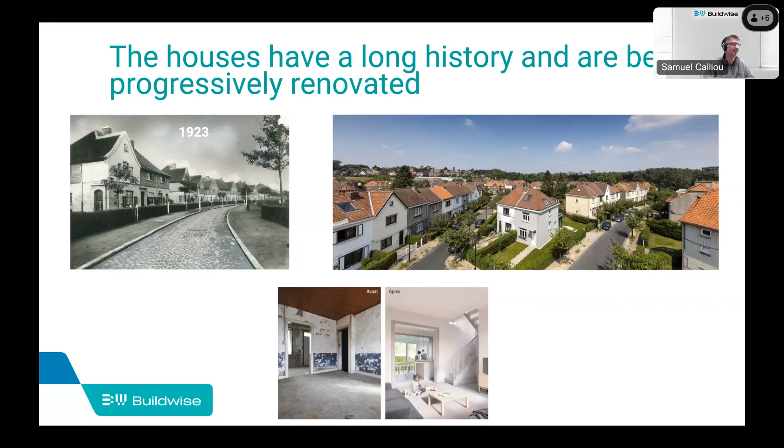These buildings can be quite old, with a long history. Some of the buildings in our sample were older than 100 years old. This kind of building has sometimes been renovated progressively in the past, and today we have to update these buildings to our current standards of energy and indoor air quality, but this is usually not easy.

So even in a very old dwelling, the indoor air quality can be an issue, especially in the bedroom, because in previous renovations, for example, the windows have been changed and other improvements made. So even if the airtightness of the building is not so good in general, you can have very good airtightness in the bedroom, and without a ventilation system, it is quite impossible to achieve good indoor air quality.

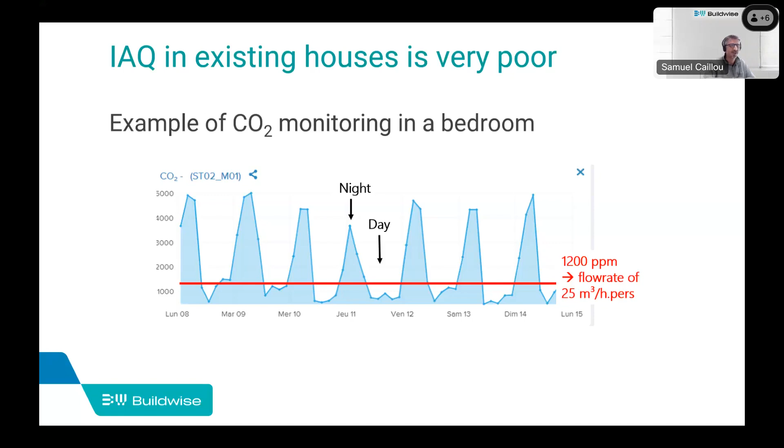And the most common systems for new buildings are for sure the fan-assisted exhaust ventilation system, mechanical exhaust ventilation system, and fan-assisted balanced ventilation system with possible heat recovery.

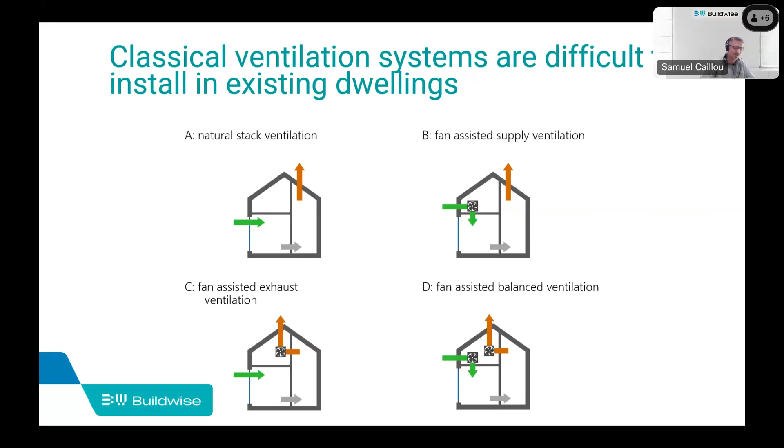But these systems are quite difficult to install in an existing building. The first problem is for sure the space needed, for example, the ductwork and the ventilation unit. But also some of the installation work is quite invasive. You sometimes need ductwork and then a service technical shaft to include this ductwork.

And for some ventilation systems, for example mechanical exhaust ventilation systems, you have to install an inlet or natural supply opening in a different room, and this is not so easy in an existing building.

Also, some simplified or incomplete systems are sometimes installed in existing buildings, but we also know that these systems are not efficient enough in most cases. And last but not least, cost is also a challenge in retrofitting a dwelling, and installing a ventilation system is sometimes expensive.

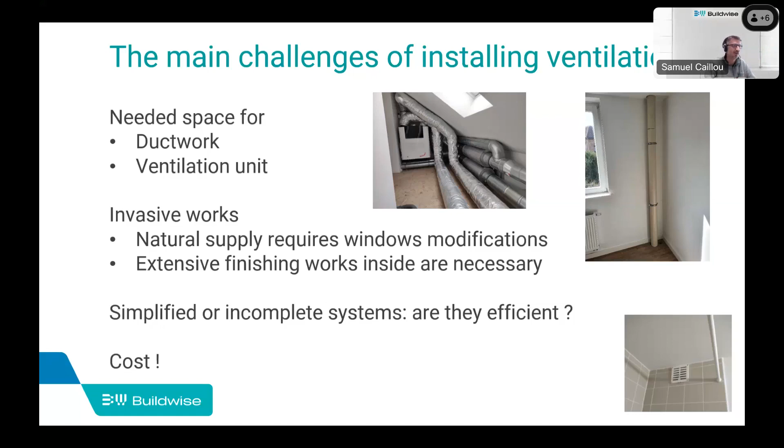So based on different simulation work, with the aim of finding more efficient, simplified ventilation systems, we have identified different innovative ventilation systems that are easier to install in renovation. The first of the systems is based on a mechanical balanced ventilation system.

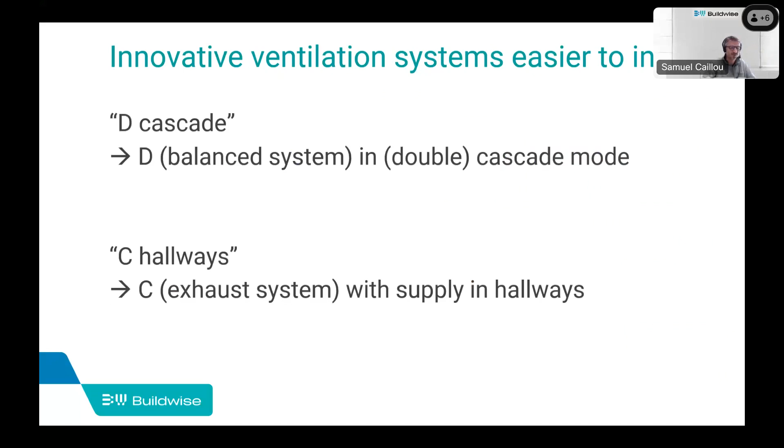in a double cascade mode, and the second one I will show you is a fan-assisted mechanical exhaust ventilation system, but we supply in the hallways. I will start with the first system.

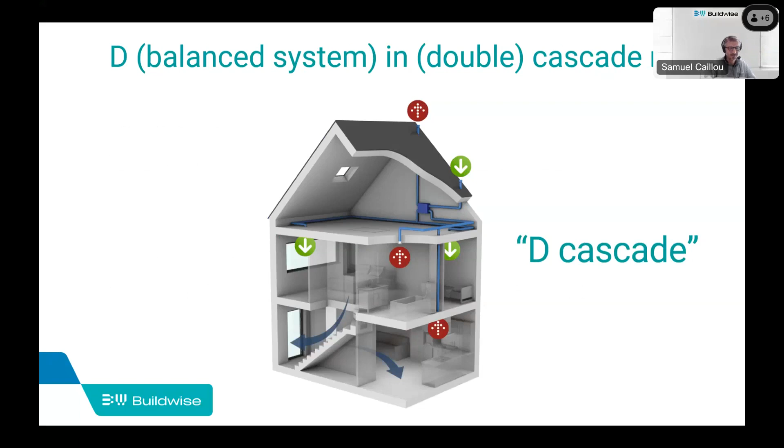So this is based on a balanced ventilation system, but with a specific and innovative ventilation strategy. I will show you this with an example, a two-story house. This is a quite small house with 2 bedrooms on the first floor.

So this is really a balanced ventilation system. As with the classical balanced ventilation system, you have mechanical supply in some rooms and mechanical exhaust in other rooms. But the particularity of this system is that the mechanical supply is only done in the bedroom, and not, in this case, in the living room. We have no direct mechanical supply in the living room.

The living room is ventilated by air transferred from the bedroom towards the hallways, the corridors, and then to the living room. And of course, we have mechanical exhaust in the kitchen, bathroom, and other service rooms.

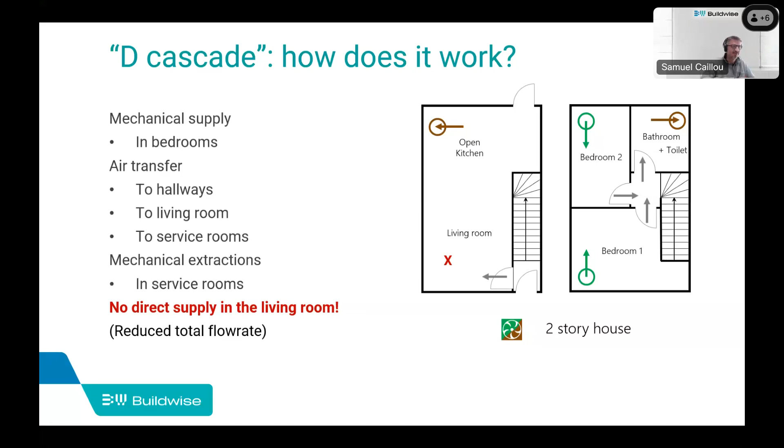This system is easy to install with current components on the market, for sure in Belgium and other countries. You need classical ductwork, classical air terminal devices, and ventilation units for balanced ventilation systems with heat recovery, for example—so classical components. It's easy to find these components.

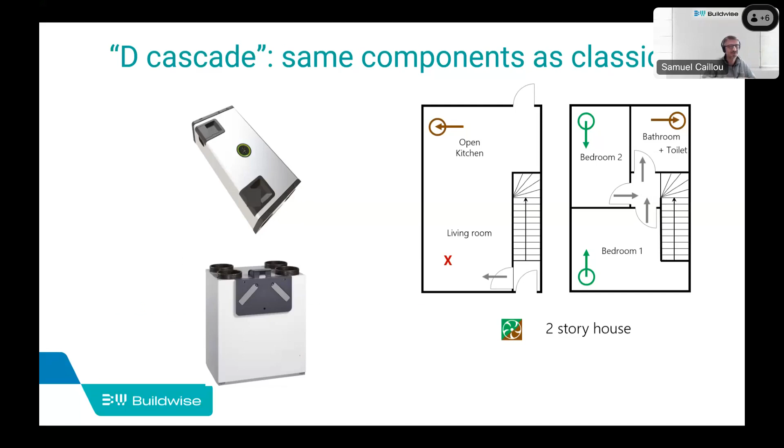This system can also be controlled with several possible control options. The first thing I have to say is that in this system, the total design flow rate is quite reduced compared to a classical balanced ventilation system for the same dwelling, so it's good for energy because the flow rate is already reduced.

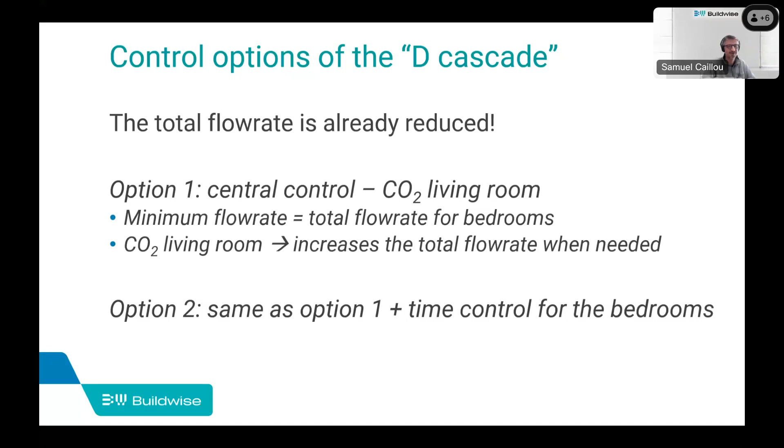But if we want to control the flow rate more, there are several possibilities. One of the first is to have central control of the flow rate based on a CO2 sensor in the living room, for example, and also a minimum permanent flow rate in the bedroom with this central control. Other options are also possible—for example, you can add time control or other controls for this system.

The main advantages of this innovative balanced ventilation system in D cascade is the fact that you don't need ductwork and an air terminal device in the living room, which is in some existing buildings the most difficult to install in a real building. So it's easier to install, and that also reduces the cost for installation because you can have a smaller ventilation unit and less ductwork and components. At the same time, the system is very efficient, and for sure as efficient as the classical balanced ventilation system.

In terms of indoor air quality, heat recovery is also possible, and as I just said, the flow rate is a bit reduced. Last but not least, this system is not influenced by bad air tightness of the building in terms of indoor air quality. So even in a building where the air tightness is not good or not known, this system will give good indoor air quality.

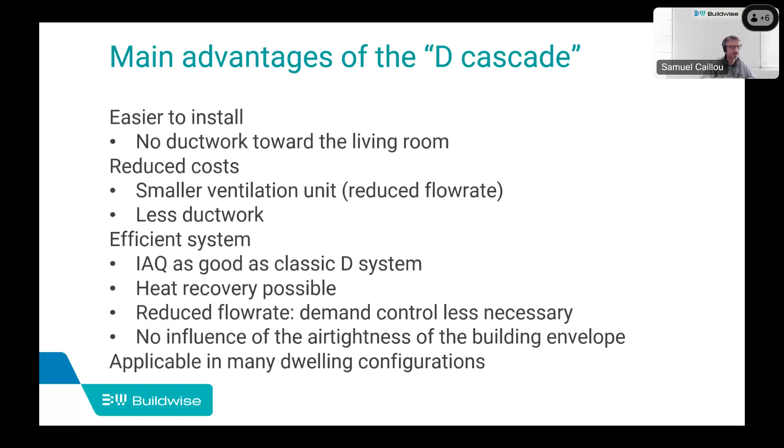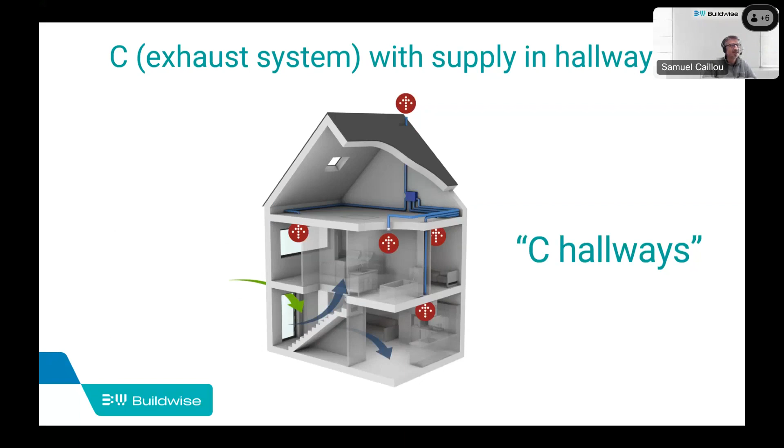Now, a few words about the second innovative system I would like to show you. This is based on a mechanical exhaust ventilation system, a fan-assist exhaust system, but in this case with supply in the hallways. Again, on the same example house with two bedrooms, I will show you the principle of this system. So it's a fan-assist mechanical exhaust system. You have natural supply in some places and mechanical exhaust in some rooms.

But the difference from the classical system is that here we have mechanical exhaust in each room, so also, for example, in the bedroom. The second difference is that you don't have an air inlet or natural supply opening directly in the room, for example in the bedroom, but only at one place in the main hallway or main corridor.

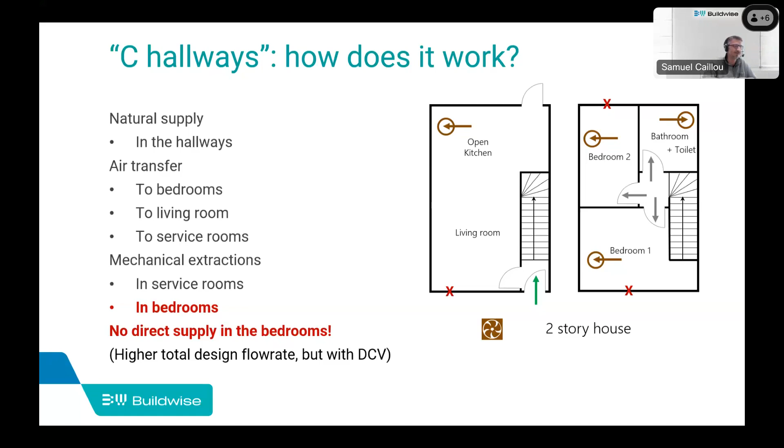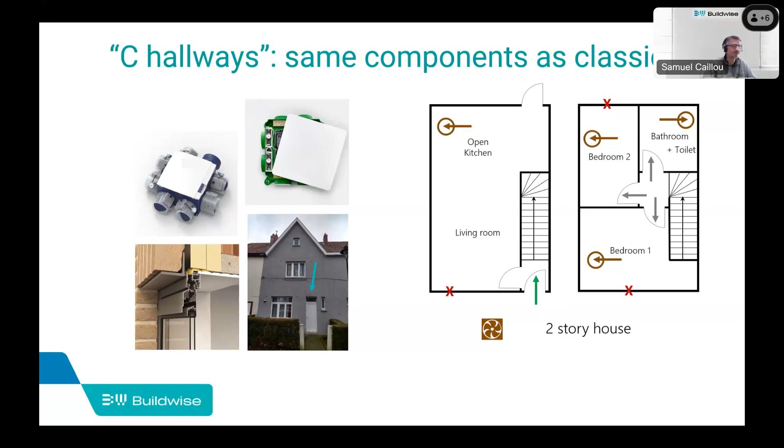This system is also easily applicable with classical components available on the market, at least in Belgium—so ductwork, air terminal devices, and an exhaust ventilation unit with advanced control possibilities. About the control, this system has a higher design flow rate, so the total design flow rate can be higher compared to a classical fan-assist exhaust mechanical system.

But we can easily apply a demand-controlled ventilation system, for example with local control, and the flow rate can be regulated and controlled in each room separately—for example, based on CO2 in the bedroom, based on humidity in the bathroom, and so on. So in use, this system will have a very limited and reduced flow rate, which is also good for energy consumption.

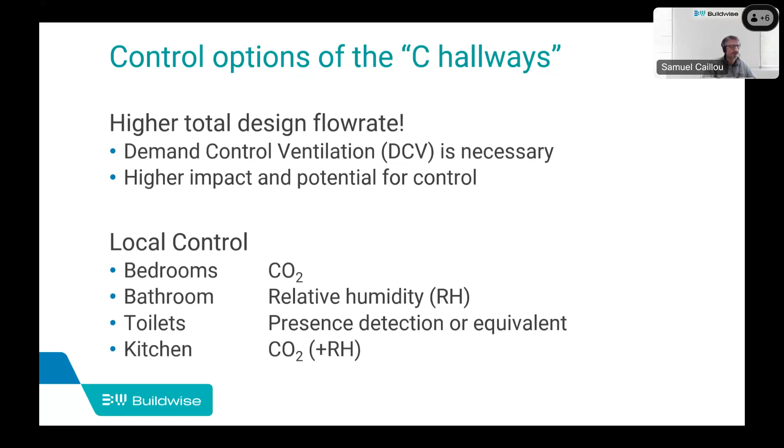The main advantages of this innovative fan-assist exhaust mechanical ventilation system are also that it is easier to install in some contexts, because you don't need to install the air inlet in the different bedrooms. So in existing buildings where the windows have already been renovated, this is an advantage. Also, a big advantage of this system compared to the classical one is that it is much more efficient than the classical one. This performance has been demonstrated using a performance-based approach, simulation, and indicators.

With this system, the indoor air quality is as good as in a balanced ventilation system. Why? Because you have mechanical extraction in each room, so the flow rate is really well controlled in each room, which is not always the case in the classical system.

Also, you don't have any influence from lack of airtightness or bad airtightness of the building envelope with this system. And regarding energy, this can be very effective because we can reduce the flow rate using demand-controlled ventilation. Finally, this system can also improve comfort because you don't have direct outside air in the bedroom, for example, or in the living room, so you have less draft and less noise from the outside.

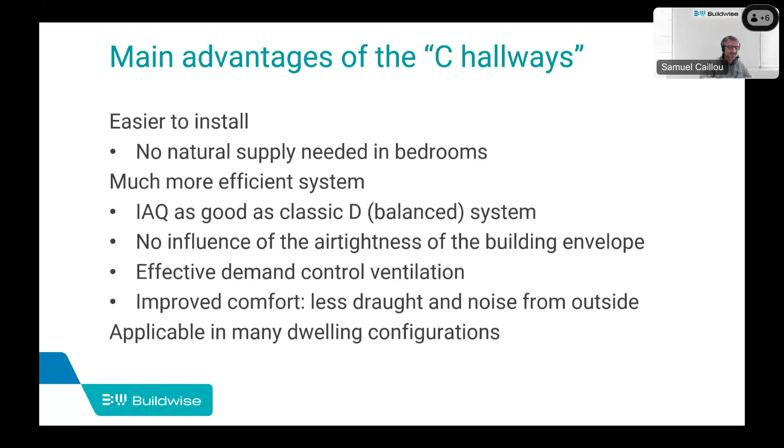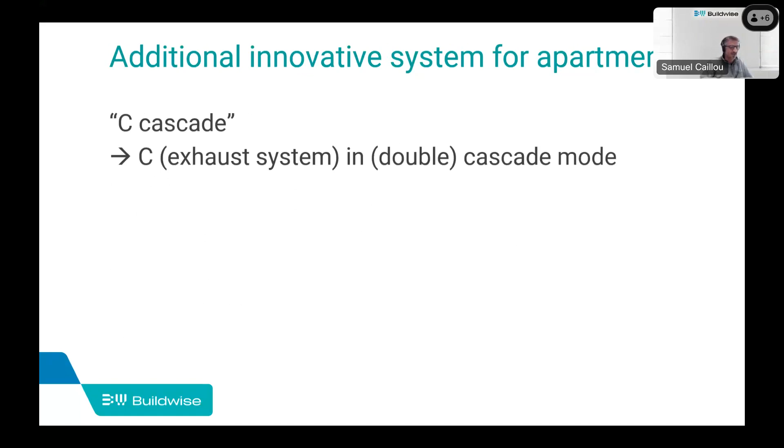Finally, I show a last system, which is a combination of the two previous systems. This system is particularly interesting in apartments. It's a combination of fan-assist mechanical ventilation, but in double cascade mode. You can see here an apartment with one bedroom and a living room with an open kitchen. You have supply of outdoor air only in the bedroom, and this air is then transferred to the corridor and to the living room and the service room.

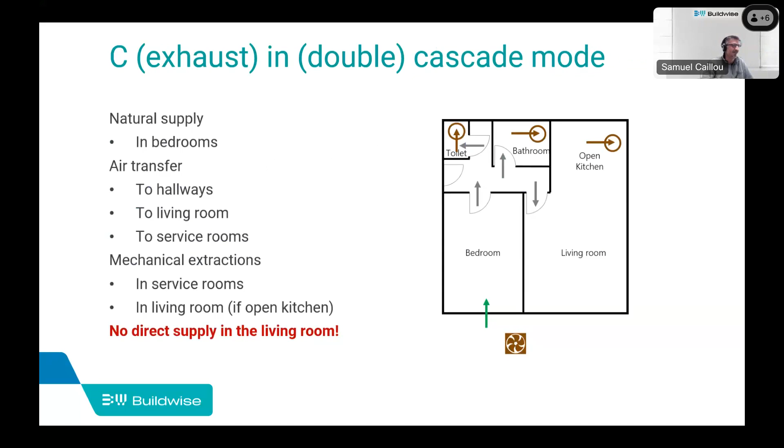So you don't have any direct supply in the living room. This is also possible in an apartment where the living room and the kitchen are separated, but in this case you have to add a mechanical extraction like you saw a few minutes ago in the previous innovative system—so mechanical extraction also in the living room.

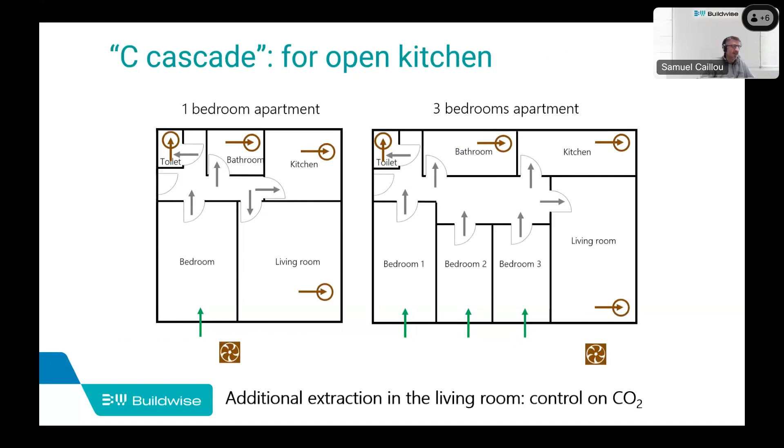The main advantages of this third system are that it is more efficient in some cases, and also easier to install, because you have only one natural supply opening. This is possible in apartments with a different approach: a centralized ventilation system using existing ductwork in the building, or a small individual ventilation system per apartment.

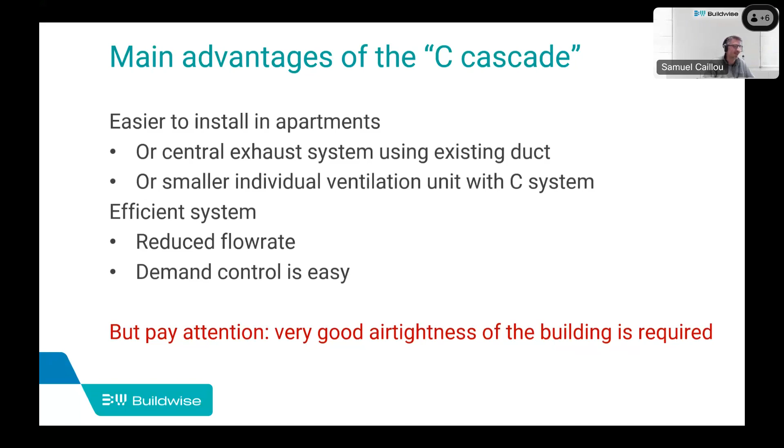I have, however, to mention that this system is quite sensitive to the air tightness of the building envelope, and to be very efficient, this system has to be combined with quite good or very good air tightness of the building envelope. So that is the last system I would like to show you today.